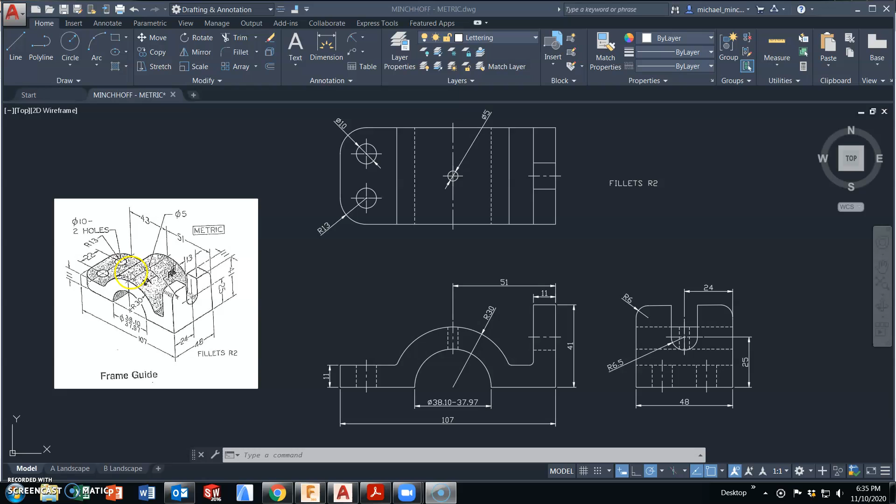Alright, for this one we'll take a look at the frame guide. A couple things to point out, or problems I see pretty often.

These two arcs, yes, they are concentric, and typically we do not measure an arc in terms of diameter, and more importantly, we don't typically dimension this in a linear fashion.

But this is a tolerance, 38.10 to 37.97, which we will be dimensioning then as a tolerance in linear format as a diameter, which is not typical. It breaks so many dimensioning rules. But we're not going to buck the system here.

Probably the biggest problem is 51. The overall length is 107. Do not snap the center of these two arcs to the midpoint. It is 51 in from the end to the center of these two arcs, which is also the center of this drilled hole.

The two 10 millimeter diameter holes are concentric to this radius of 13. By using your fillet tool to round this off, we can then find the concentric center much easier, which will save you a lot of time. You don't have to measure over.

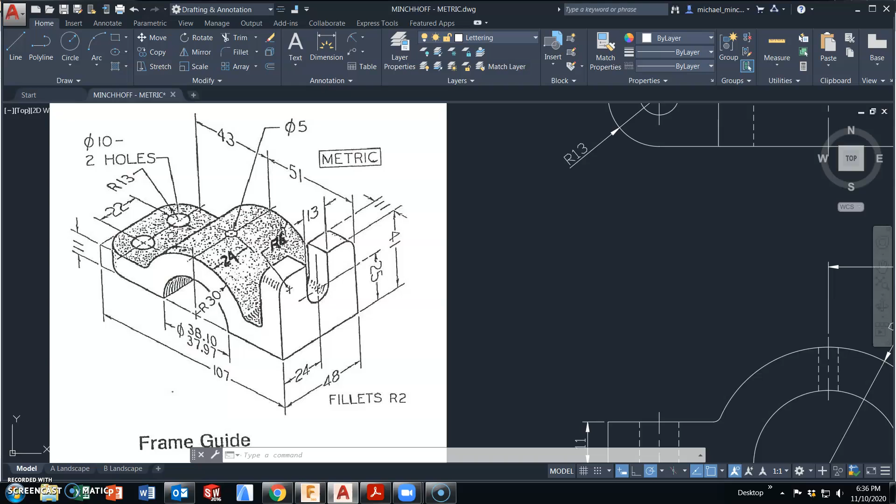If you hover over the arc after using your fillet tool, you can find that center. We do have hidden lines and center lines. We've already changed the formatting for that, the line scale factor.

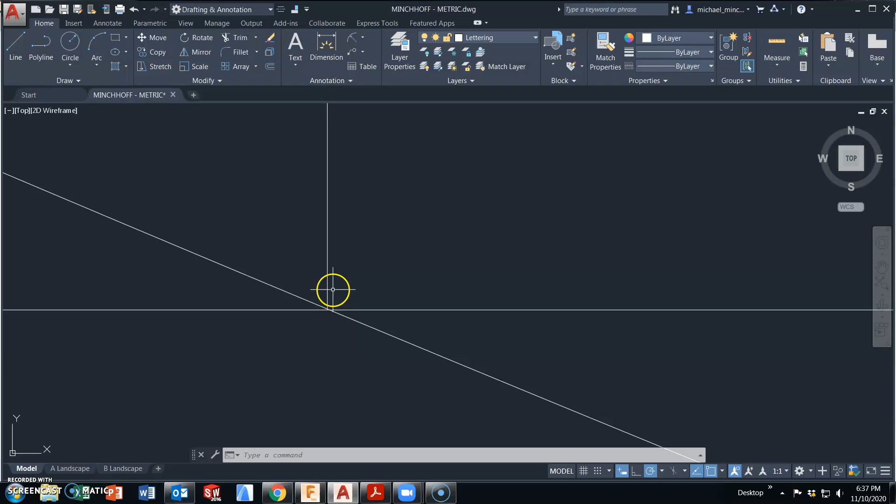We are showing this right side view to show this slot. You do have to be very careful with these hidden lines and center lines and object lines through this slot, where they continue and where they don't.

This is not a direct carryover from the right side view or from the front view either.

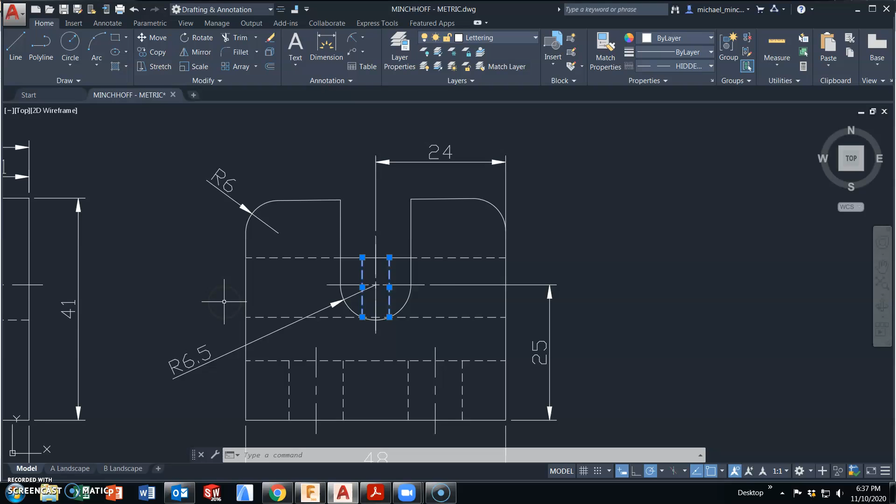This 5 millimeter hole, being that you are projecting this top arc, this actually happens down a little bit lower. This actually happens a little bit lower than the top because this is on the curve.

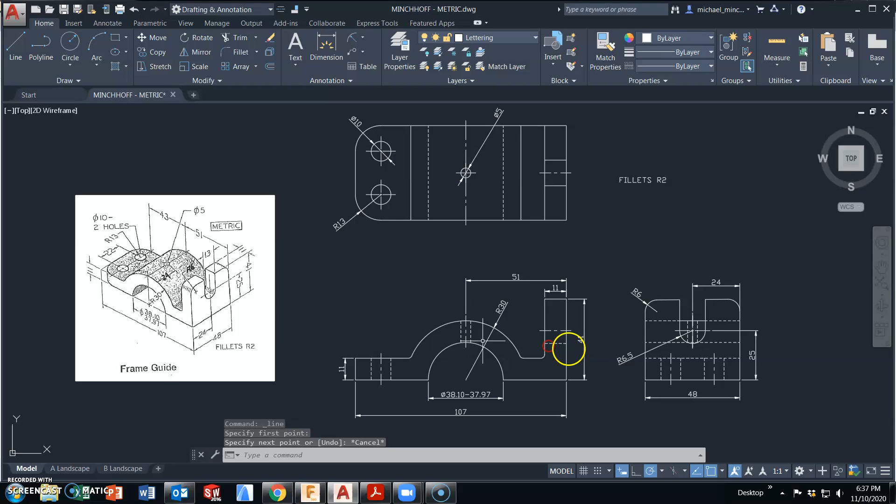Alright, so let's take a look at this one. In millimeters, top, front, and right side views, we have an overall length of 107, a height of 41 over 11,

and then down we do come up 11 and across. Again, not on the midpoint.

One option is to stretch this to a length of 51. So I want the overall length to be, oops, wrong side. I want this overall length to be 51 to find that center. It is not in the center.

So I'm using the diameter tool. 38, the whole number, is right in between or within tolerance, and a radius of 30 will give me a diameter of 60.

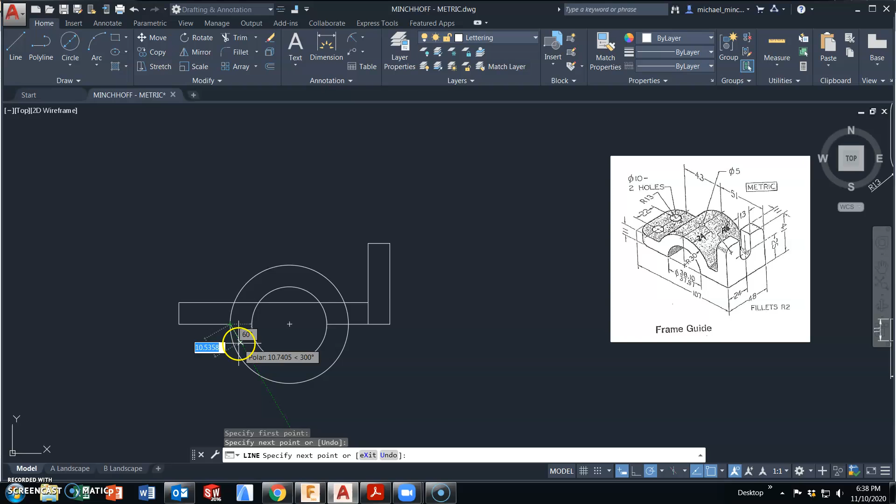This does not even need to continue through, and we will need to trim off these features by drawing the circles. So if I trim,

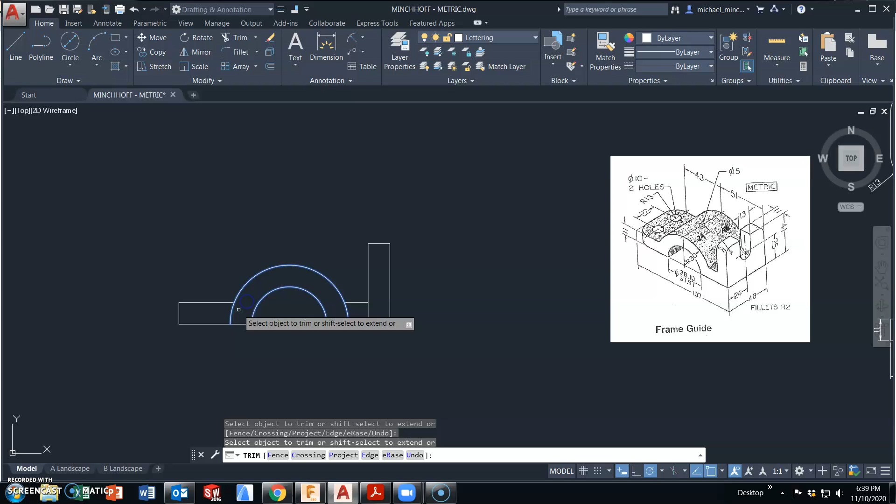I'm going to trim off the bottom half. I'm also going to trim out this object line. I need to trim this off too. Might as well trim them all at once.

Okay. So not terrible just for the basic layout of this front view. Stick with the 40 millimeters in between views. We are at 48 millimeters wide.

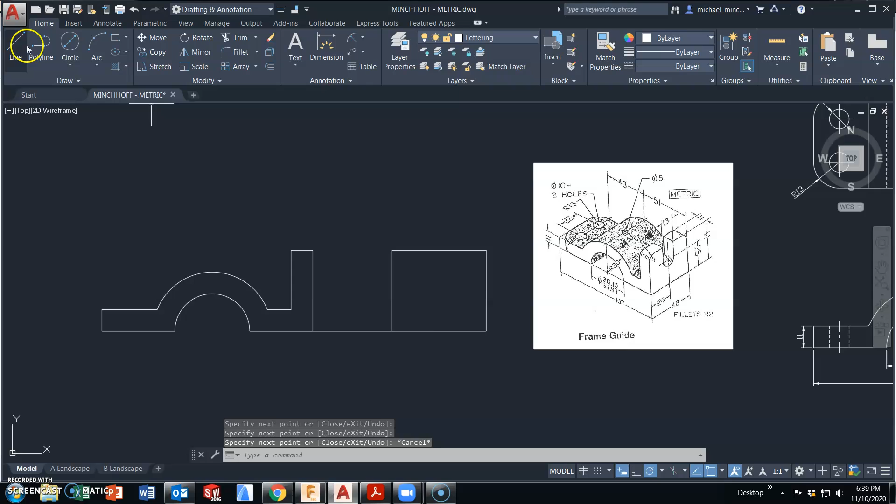And a 45-degree angle projection line. And set up my top view.

Alright, some transfers pretty straightforward. Like that's an object line. This will be an object line. This will be a hidden line. Hidden line. And an object line.

So maybe before we go too much further, I'm going to change these to hiddens.

Get rid of some of this, clean it up, so I don't get so confused.

If I use my fillet tool with a radius of 13 and round these two corners off, by doing so, when I go to draw the circle, I don't have to measure 51 plus 43 horizontally and then 22 center to center and 13 in.

If I hover over this arc, I will find the concentric center, which is now a diameter of 10 for the drilled hole. So hover over the arc and I will get the center of the arc to create that. This is down the middle, 51 millimeters in. I could project from the quadrant point below. That is a 5 millimeter diameter hole.

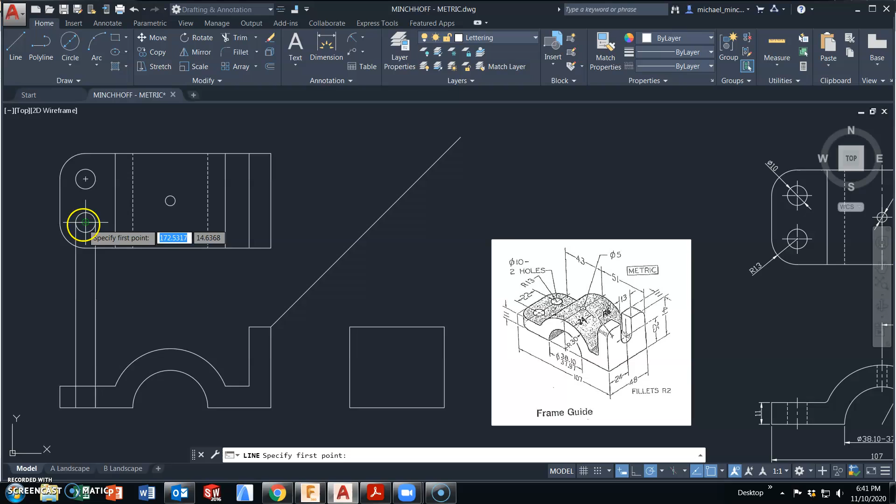So these will be hidden lines. I will also have a center line. These will be hidden lines.

Snaps too close to the midpoint or the quadrant point. I'll just trim them off. I guess I need something to trim too.

And I will have a center line. So that is just in this front view.

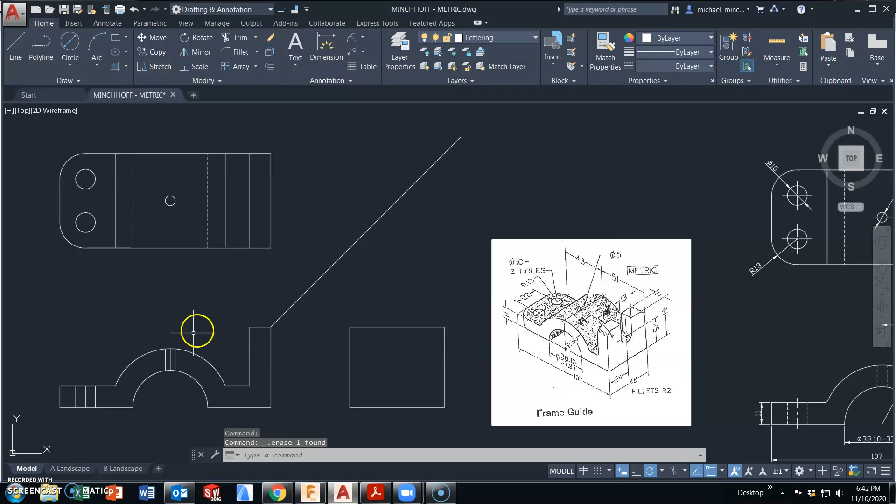Now I got to project them over and around. Hidden line. Hidden line. And another hidden line. So these three here will all be hidden.

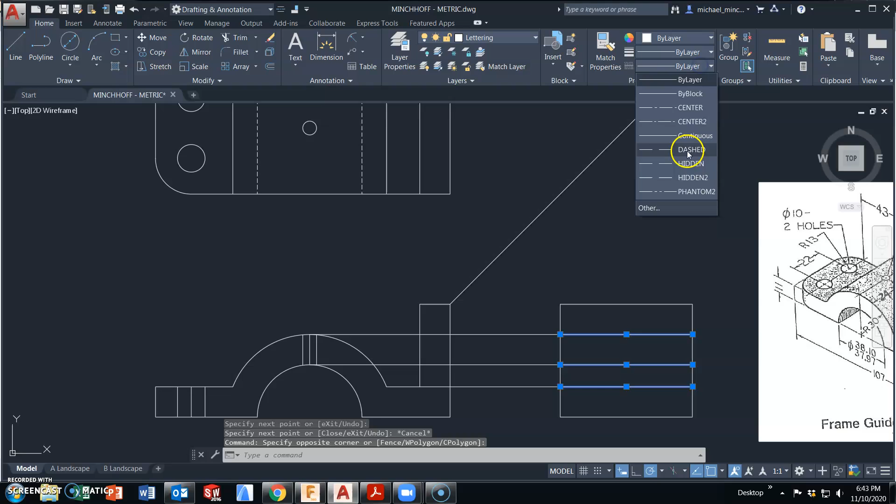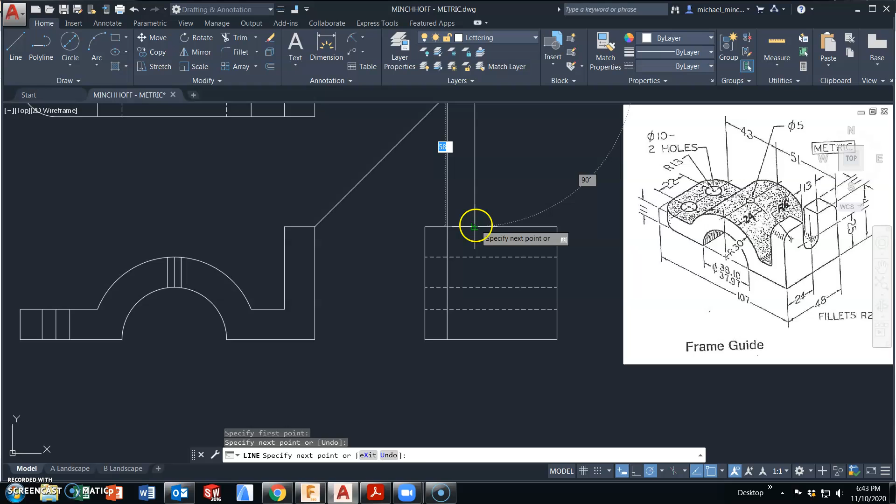Now for the holes. Being that these would be symmetrical, I would try to save yourself a little bit of work. And I don't know if this is just an old trick, if I'm nearly that old.

But if I draw an X, this sets up where my center line is, so I don't have to go and project it. This here will be a center line.

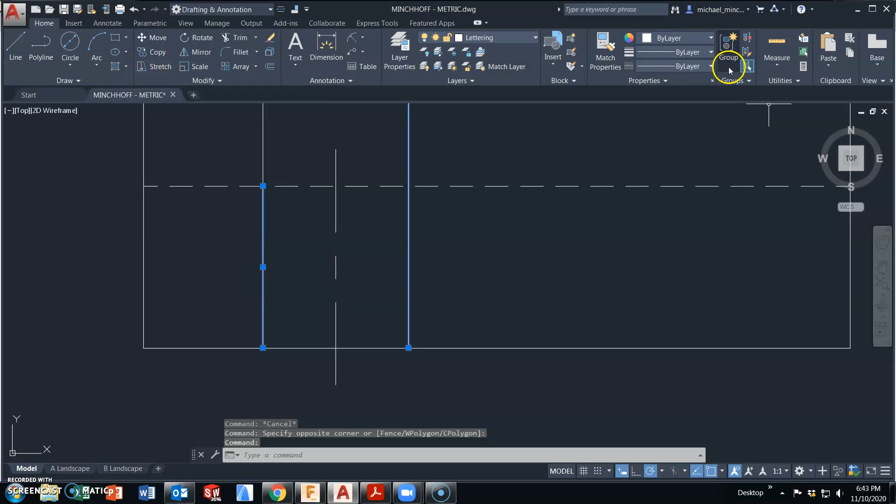Where these two are hidden for the hole.

Oops, didn't mean to delete it.

The fact that you need the slot, I would use this center line for two parts. One, to find the center of the slot, and also to mirror this to the other side.

So that distance is 24 up from the bottom. That will be the center for the arc. But I can also use that to mirror this other hole.

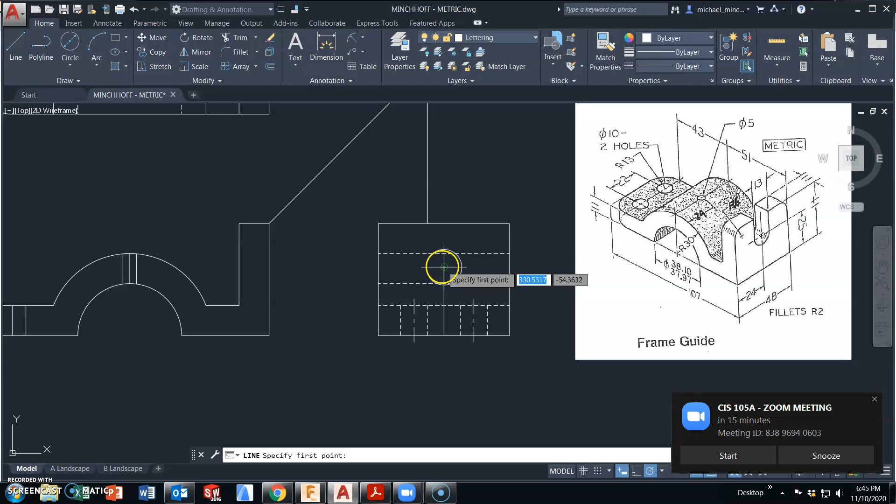So then this is the center for the slot. 13 diameter. Straight up.

We'll take some trimming, round these corners off. You can see where this really becomes an issue in through here until we go and add this.

So these are all hidden. Center lines are extended past the edge of the object.

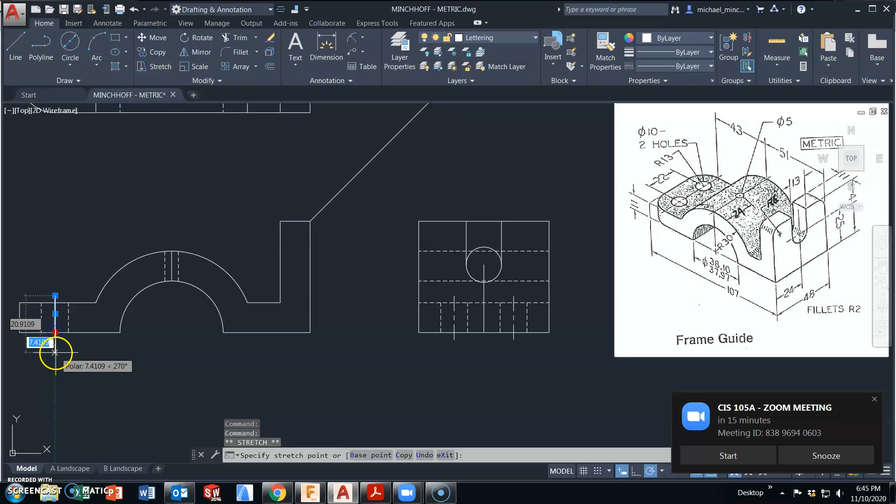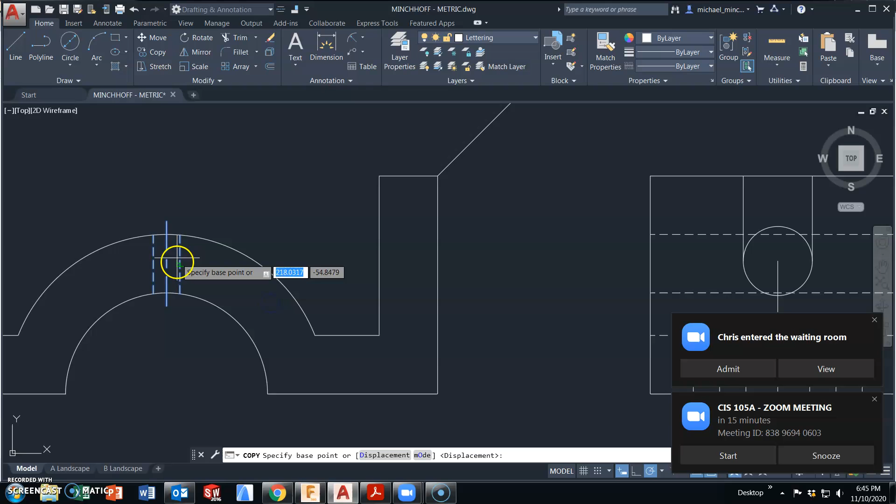And their center lines. I can start by taking this and dragging a copy. But this is going to hit this midpoint.

And you can see that these hidden lines don't hit. They go all the way up through that arc, and they extend down past it.

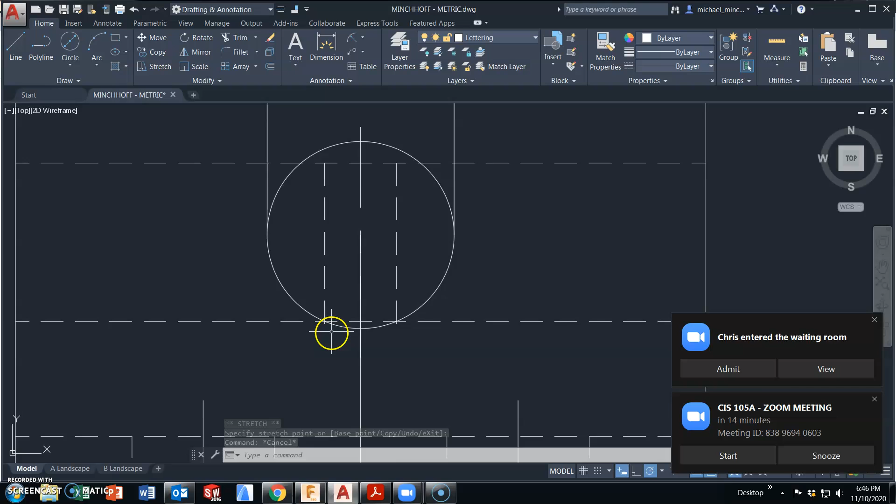They have to be brought up. Since this is the slot that goes through here,

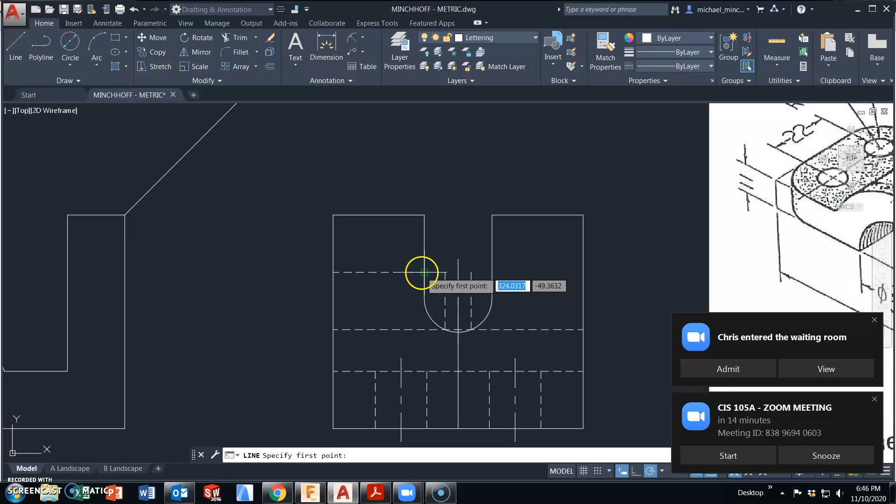this top section right in between the slot, this is an object line. So whatever combination you have to use to create that hidden solid, because it goes through the slot, and then hidden again.

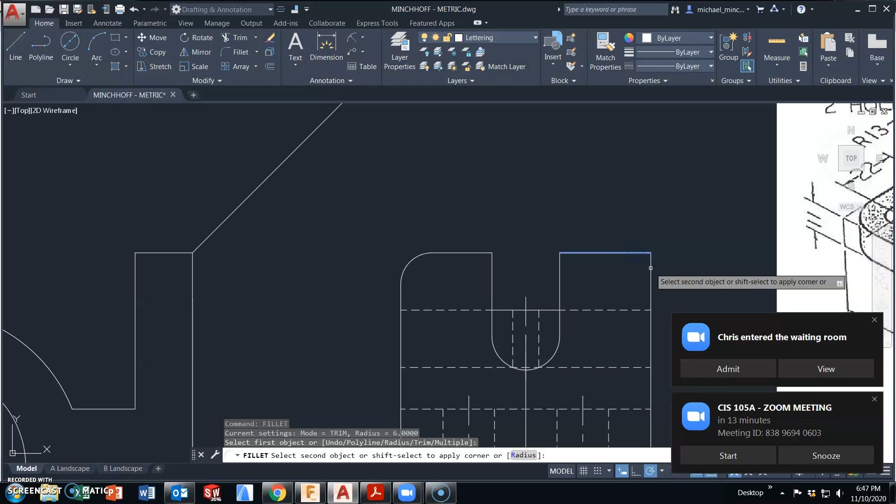From here I got to round off these corners. Radius of 6. And I should have some casting fillets, since I'm using my fillet tool. All fillets.

All in the front view. I do have to project the information for the slot.

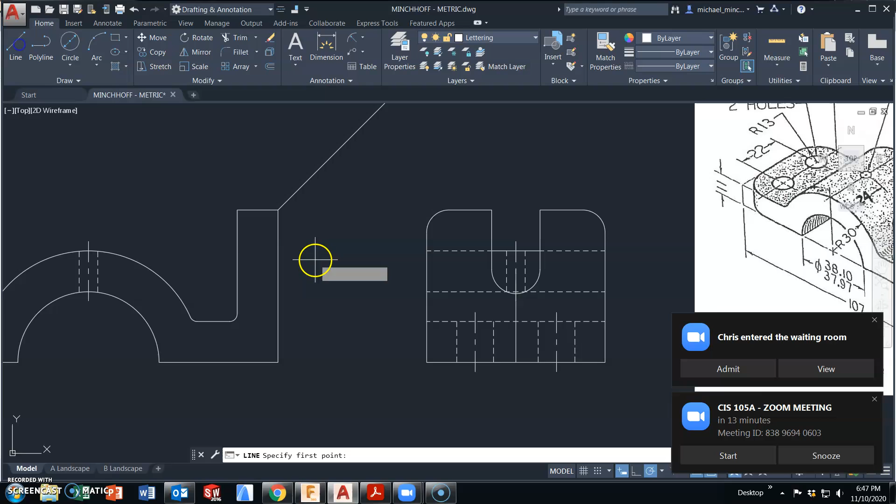So this will be a hidden line. This will be a center line. Same thing at the top.

These will be object lines in the top view, and this will be the center line.

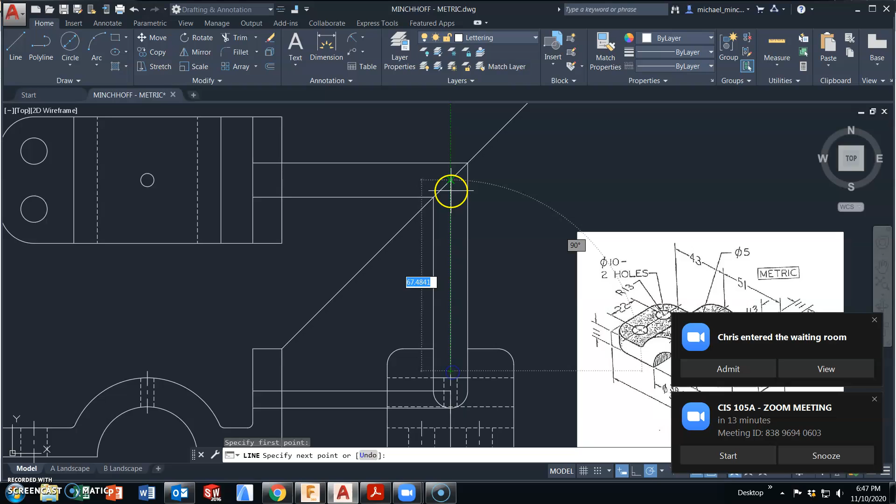So center, extend it out past the edge of the object, and 2 more hidden lines.

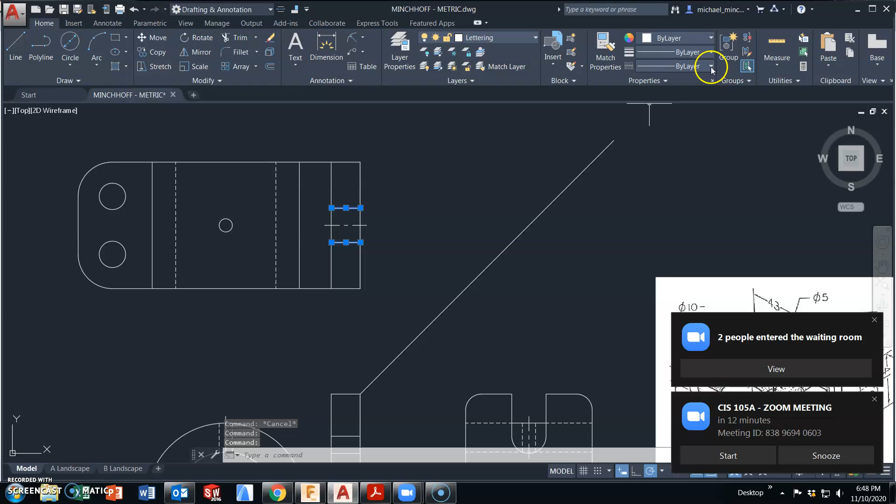All we should have, oops, this one. This one's hidden. This one's a center line.

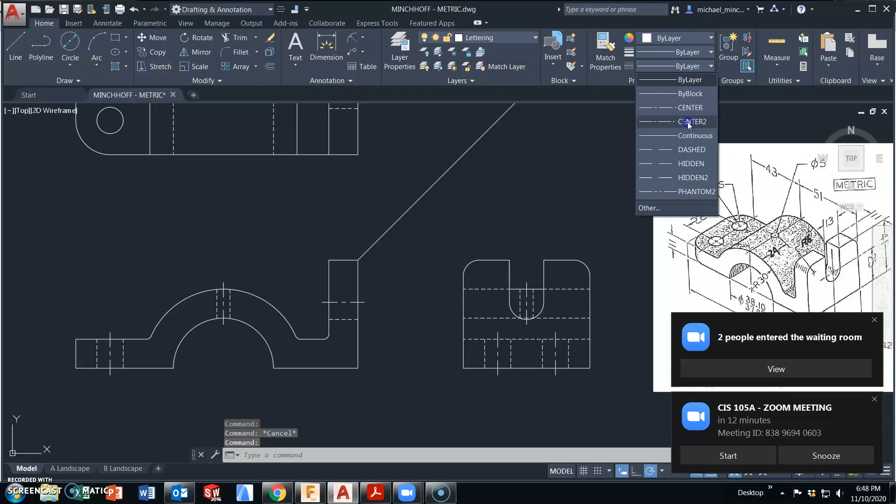All we should have left now are center marks. We've already added the center lines. We have 3.

And that should do it in terms of the drawing. Dimensioning, we will have a tolerance. We will have a note for casting fillets. We'll look at that in the next video.